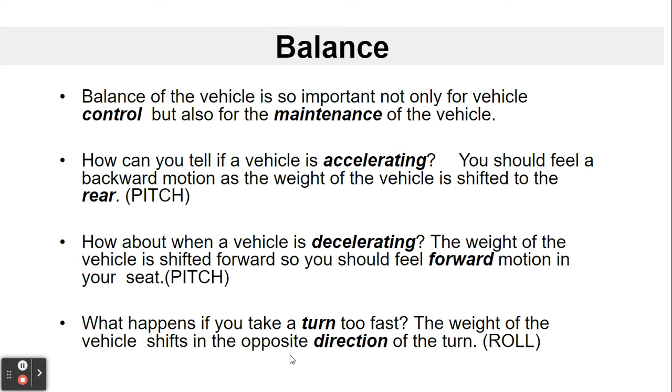How can you tell if a vehicle is accelerating? You should feel a backward motion when it accelerates as the weight of the vehicle shifts to the rear. This is called pitch. When it's decelerating, especially decelerating harder, you'll feel that pitch move forward. What happens if you take a turn too fast? The weight of the vehicle shifts in the opposite direction of the turn, and this is called roll. If we roll too hard, we actually roll the vehicle. Sliding, your back wheel sliding out, this would be considered yaw.

Single vehicle crashes - what are the factors? Statistics show that more than 50% of occupant fatalities occur as a result of a single vehicle crash. That's quite a lot. You're not safe even if there's no one else on the road.

What are the roadway conditions? They are icy and snowy. That means traction is minimal or impaired. If we put in one more factor - sharp turn, bad road or surface conditions, and high speed - the result is a single car accident or crash. 50% of occupant fatalities result from a single car accident.

Single vehicle crashes involve too fast for conditions, improper steering or braking, or a combination of all three. Remember, guys, and I will say this a thousand times: speed kills. Reduce your speed. It's not that bad.

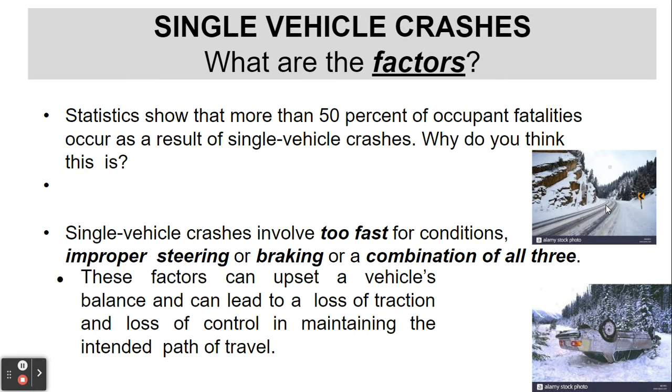All these factors can upset a vehicle's balance and can lead to a loss of traction and a loss of control in maintaining the intended path of travel. Let me tell you, once you lose control, even if you somehow gain traction back, you usually aren't in a position where you have control of the vehicle, especially if you're going fast.

Road surface and traction - you must learn to recognize conditions that may indicate a change in traction. This is vital, which in turn will require a change in speed or direction by you. And these are the types of things you can discuss on every commentary drive. What is the surface condition of the road at this very moment? What was it earlier? Let's look at the weather right now.

What can I predict about the surface conditions of the road in the next 15, 20 minutes? Is it going to change? Are they ideal? What's wrong with them? How is this going to affect my speed? How is this going to affect my turns?

Traction is the adhesion, friction, or grip between the tires and the road surface. Without traction, a driver cannot brake, steer, or accelerate their vehicle. A loss of traction can cause loss of control, resulting in skidding or worse. Traction varies with the vehicle's speed, tire condition, and roadway surface.

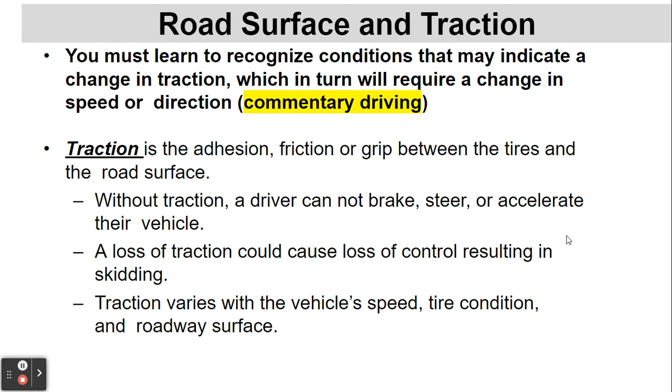This is going to be a breakout video or breakout room exercise for you. We're going to watch the video, and then you guys are going to discuss these questions together. Describe the road conditions' effect on the physics of driving in this video. Are there examples of minimize, separate, or compromise that you identify in this video? What do you think the first truck driver is thinking? What is your opinion about the actions of the last oncoming car from the right?

So we don't see him yet, but we'll see him coming up. This is the first truck driver right here. What do you think - good decision or not a good decision? Here we go.

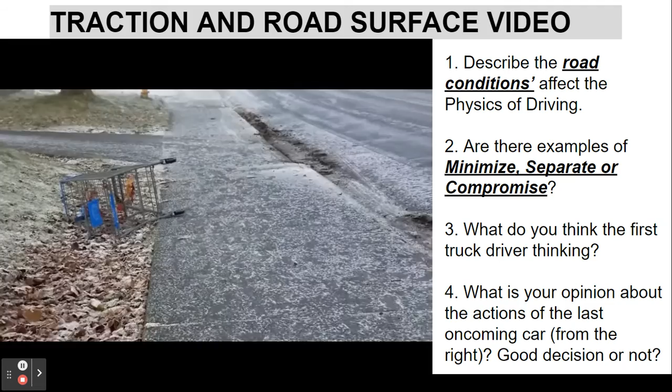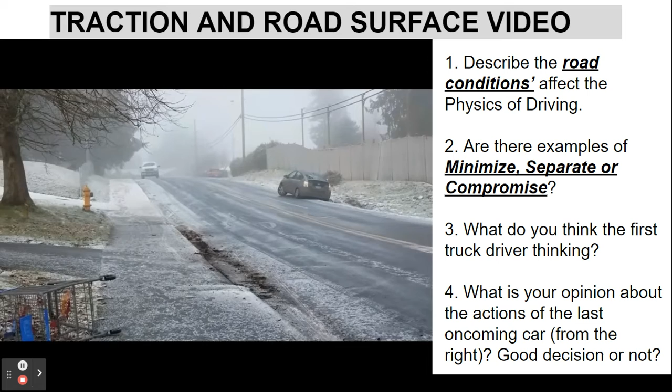Let's see if we can get this truck down. Oh, he's thinking about it. He might turn back. Oh no, he's going to brave it. He's already sliding, I think. I don't know, we'll see.

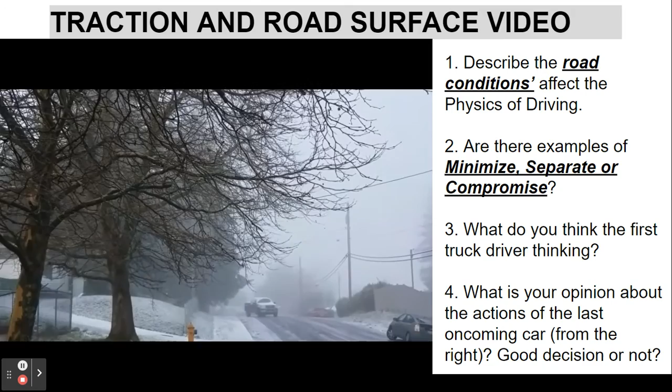Oh, he stopped. Did he stop? No, he's just going really slowly, but he's still sliding. Oh no, he's changing his mind. Oh man, this car is going so fast. He is totally going to kill it.

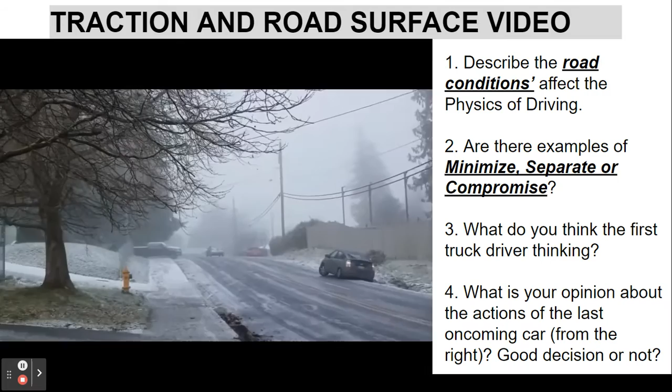Wow, impressive. He slid all around, but he did make it up. Props to him.

All right, so see if I can pause it. There we go. So what are the road conditions here? They are extremely icy, they're slick. Traction is minimal, especially on the slope. And we kind of have a crowned road here where it slopes down from the center line, right?

Are there examples of minimize, separate, or compromise? Yeah, we definitely see people trying to minimize by going around this car that's stopped on the side of the road. Looks like it got stuck there. Probably it's the driver's car. Okay, we have that.

Trying to think if we have any other situations with separate. I didn't think I saw any, but we definitely have minimize.

What do you think the first truck driver was thinking there? In my opinion, he was standing up there trying to decide whether or not it was safe to try to go down the road here. He was definitely waiting for the white car to clear out.

For that last car that was speeding along very fast, minimized and went around this parked car and then up the hill - do I think this was a good idea? Probably not. I think he was going really fast for someone with these types of road conditions, and if some other car was coming, I don't think they would have had enough distance to stop.

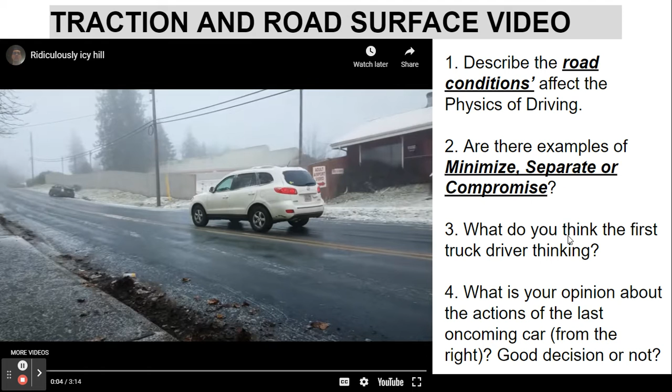Okay, here we go, road surfaces. Road surfaces produce different amounts of traction. The following are ranked in order from the greatest traction to the least, right? Concrete at the most gives you the most traction, then asphalt. Brick and polished concrete doesn't give you too much. Dirt doesn't give you much at all. Gravel's even worse than dirt. And sand over hard surfaces, not very good - it's almost like driving on snow.

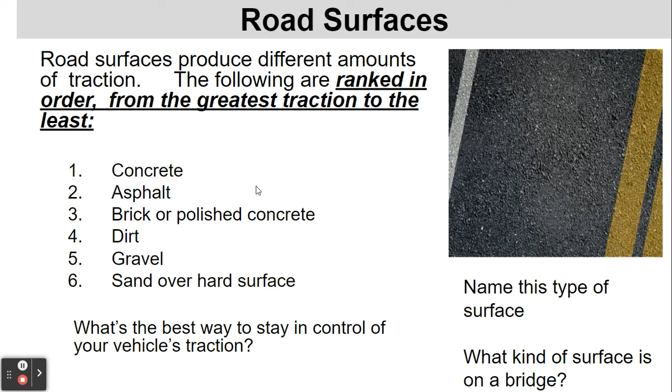What's the best way to stay in control of your vehicle's traction? The best way is to reduce your speed, okay, and try not to make sharp turns. Okay, this type of surface here is asphalt. What kind of surface is a bridge usually? Usually it is concrete because they want to make it as good for traction as they can.

Okay, conditions that affect traction - some substances on the road. So there are tons of substances on the road, and many of them affect traction in a negative way. Some of the stuff that's on the road are sewer covers - they reduce traction, especially the metal part, right? Paint, definitely, vinyl strips also. Tar reduces traction, especially when warm. Wet leaves are really, really bad. Sand is bad. Loose gravel or mud, bad. Oil, tar, radiator overflow, and rubber left by frequent vehicle starts and stops at intersections. Yep, so be careful when we get to intersections because there's quite a bit of stuff there that will affect traction.

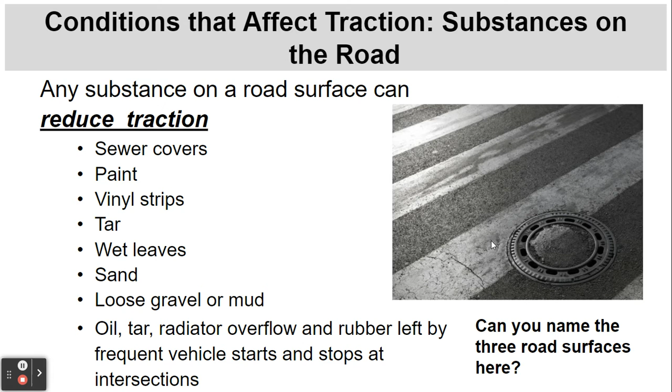Can you name the three road surfaces here? Well, we have the sewer cover with the metal, we have asphalt right here, and we have the vinyl strip or paint right here.

Conditions that affect traction: surface conditions. Poor road conditions such as rippled surfaces or potholes can contribute to a loss of traction. I've had real issues with rippled surfaces in the past—they ruined one of my tires.

At the beginning of a rainstorm, dirt and oil can rise and mix on the roadway, making the road extremely slippery. So beginning of rainstorms are really, really bad. Be very careful.

At speeds as low as 35 miles per hour and a water depth of only a 1/12 of an inch, hydroplaning can occur. Be very cautious about that—we're talking 35 miles per hour and only 1/12 of an inch. That's not much water at all, guys.

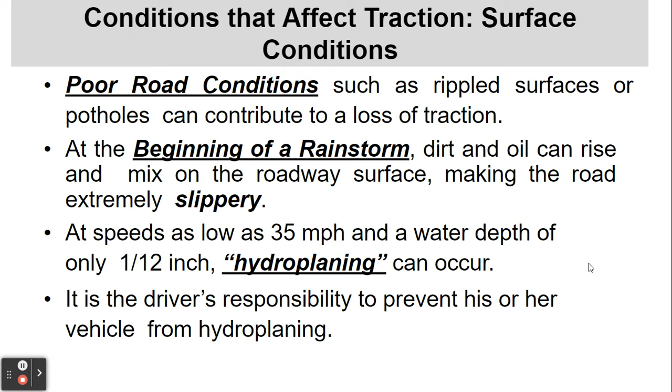It is the driver's responsibility to prevent his or her vehicle from hydroplaning. How do we prevent hydroplaning? It's all about speed and the tread on your tires.

New York State Motor Vehicle Inspection requirements for tires is a minimum tread of 2/32 of an inch, or 1/16 of an inch. In this video, we compare two identical vehicles. Only one has deep new tire tread depth, and the other has legal minimum tire tread depth—so it's still legal, but look at the difference when you see this.

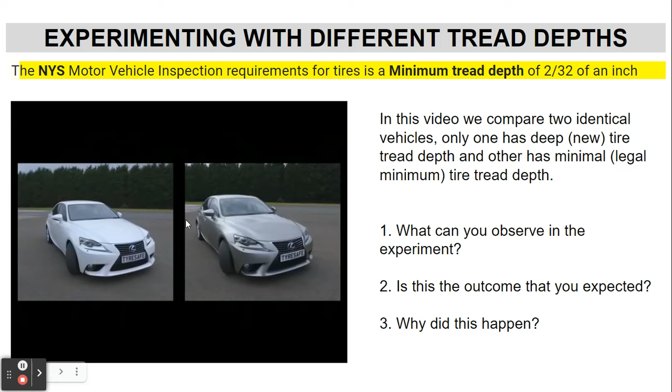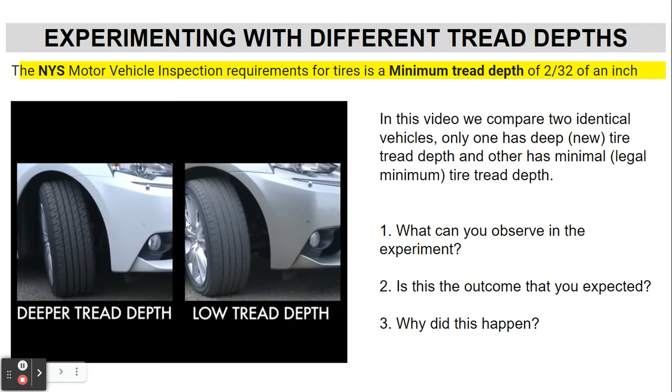To show aquaplaning in action, we took two identical cars and fitted them with identical tires, but with different tread depths. The car on the left has brand new tires with a deep tread depth, while the car on the right is fitted with tires with a much lower tread depth of 1.6 millimeters, which is currently the legal minimum tread depth. Our test track has been flooded to replicate how a normal road could look after a heavy downpour.

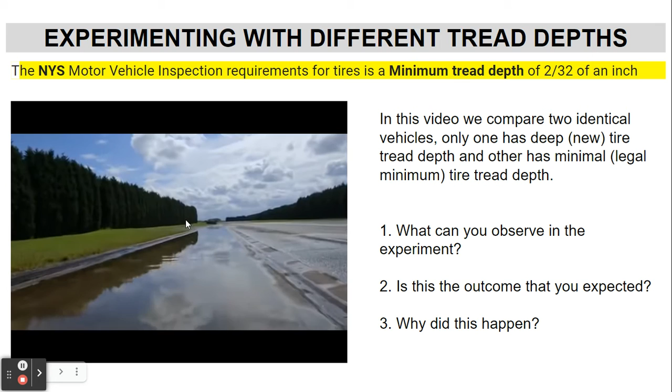Let's see how the cars and their tires cope with the hazardous conditions. Firstly, our car with deeper tread depth takes the test. The split screen clearly shows that when our driver steers the car, the wheels turn, which then causes the car to swerve on the track.

Now it's the turn of our car with low tread depth to take the test. Here, the split screen shows that despite the driver steering the car and the wheels clearly turning, the car doesn't swerve on the track. Let's have another look at the car's movement on the track in a closer comparison.

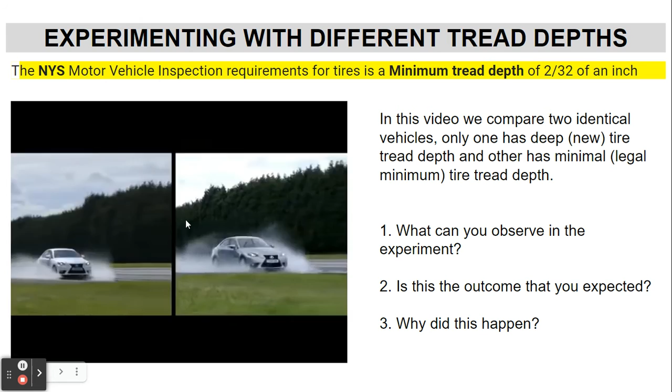The car on the left has deeper tread depth and displays clear control when steered, while the car on the right has low tread depth and doesn't swerve when steered. This is because the car with low tread depth is aquaplaning.

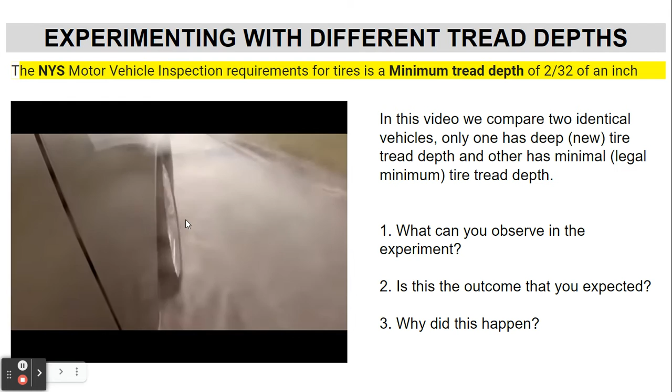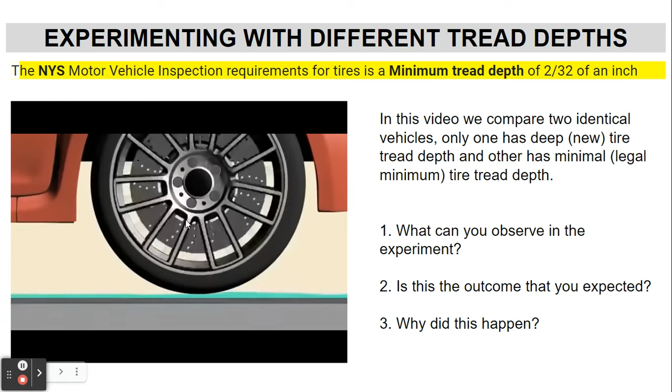So why does this happen? This graphic demonstrates what happens when a tire with insufficient tread depth comes into contact with too much water on the road. As the tire doesn't have adequate tread depth, the water cannot be displaced and builds up in front of the tire. The tire then lifts from the road on top of the water with no direct contact with the road. The driver no longer has...

So we saw what happened there with how tire tread depth affects traction on the road when there is standing water—that's what we could observe. We observed that tread depth definitely plays a role in traction, right?

Same car, everything the same except different tread depth on the tires. Is this the outcome you expected? That's up for you to tell me. And why did this all happen? Tread depth allows you to continue steering and not hydroplane.

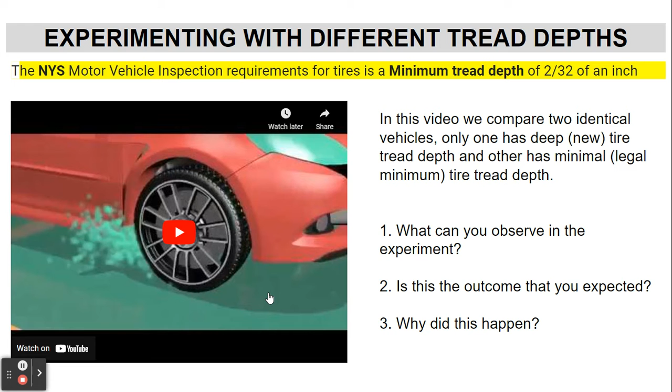Here we go, let's continue on—complete control of the vehicle. So how do we inspect or how do we monitor the tread depth of our tires on our vehicle? Let's take a look.

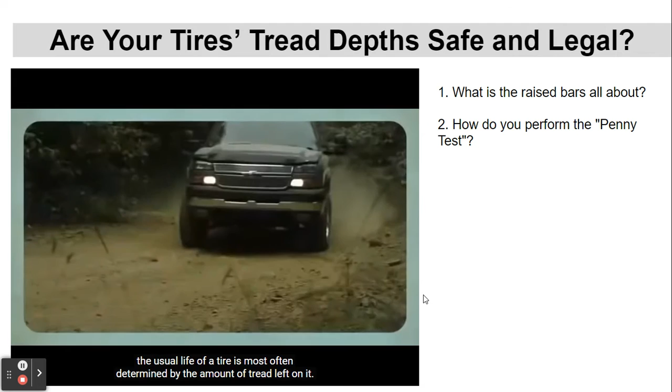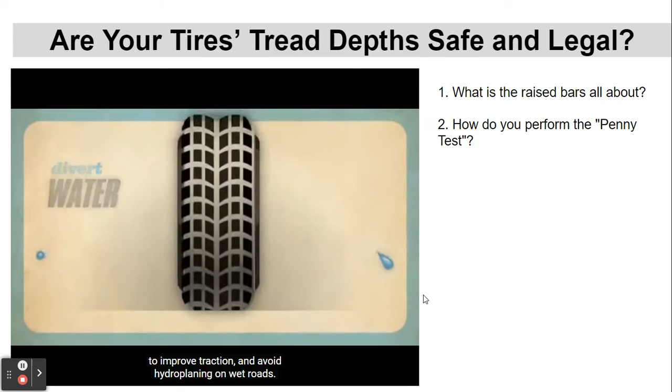Ever wonder when to replace your worn car tires? Barring any irregular or unsafe wear patterns, the usual life of a tire is most often determined by the amount of tread left on it. The primary function of tread is to divert water from beneath the tire to improve traction and avoid hydroplaning on wet roads. Tires become unsafe when they're worn.

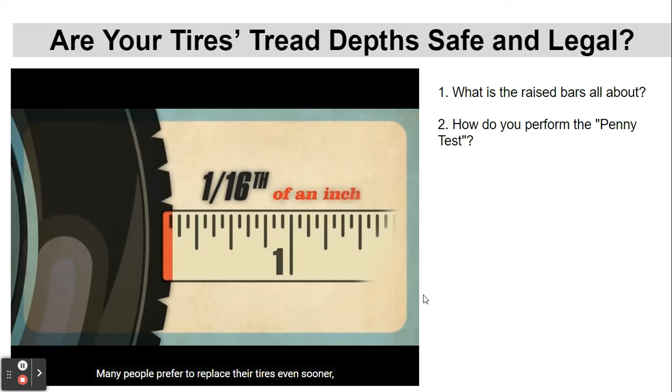Specifically, once the tread is down to 1/16th of an inch, many people prefer to replace their tires even sooner, especially when driving in adverse weather conditions. All tires sold in the United States today have what are called tread wear bars.

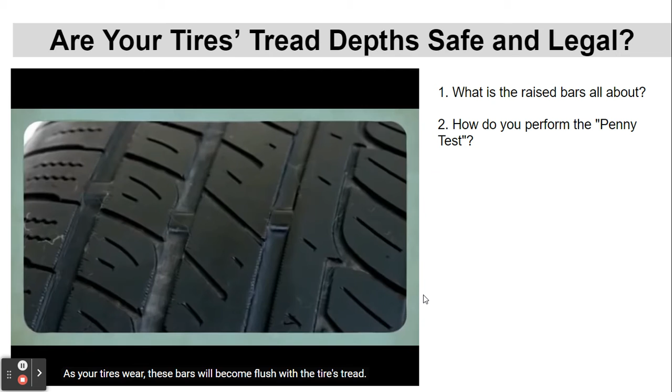These are small raised bars of rubber in the grooves of your tire's tread. Look at the tread pattern, and you'll see these bars running between the tread blocks. As your tires wear, these bars will become flush with the tire's tread. When this happens, it's time to replace the tires.

An easy way to check the tread on your tires is to do the penny test. Take a penny and place Lincoln's head in one of the grooves of the tire tread. If you can see all of Lincoln's head above the copper, it's time to replace the tire. These are unsafe to drive on. If the penny is inserted enough that the tire tread is at least as deep as Lincoln's forehead, your tires are generally considered safe and do not need replacing.

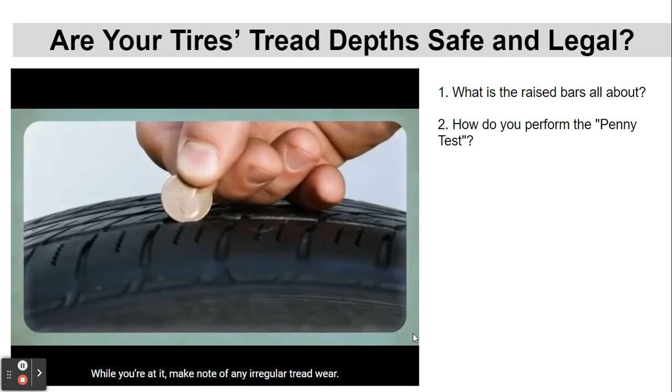Make sure when you're administering the penny test that you check all 4 of your tires. While you're at it, make note of any irregular tread wear. This could indicate a wheel misalignment or need for tire rotation, or both. Talk to one of our tire experts if you think your tires are wearing unevenly. Thanks for watching, and thanks again for making Les Schwab your tire store.

Okay, very nice, handy video to help us manage traction better, right? So the raised bars, they're there to tell you it is time to get new tires. Your tires are worn out.

How do you perform the penny test? You stick it down there, and if you can see all of Lincoln's head, you need new tires. Okay, what you want to see is his head go down to his forehead. That means you have good tread for your driving. Okay, let's move along.

I'm thinking the opposite. Let's say it was 40 degrees, it rained, and then it started getting really cold. Okay, so there's all this precipitation on the road that is starting to freeze. Okay, remember, wet ice is more slippery than dry ice. Intersections are likely to be slicker because starting and stopping vehicles polish the ice there.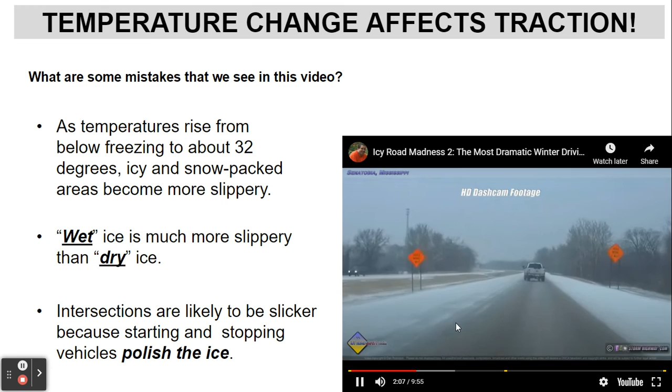Okay, so we saw a lot of stuff there. We saw what were the mistakes here that they were making. Well, they were going around that turn way too fast for the current conditions of the road, which were probably really deceptive. It's probably hard to see. It was dark at night. It had probably been raining, looked like, so there's water mixed in with the ice, which created a very, very slippery surface.

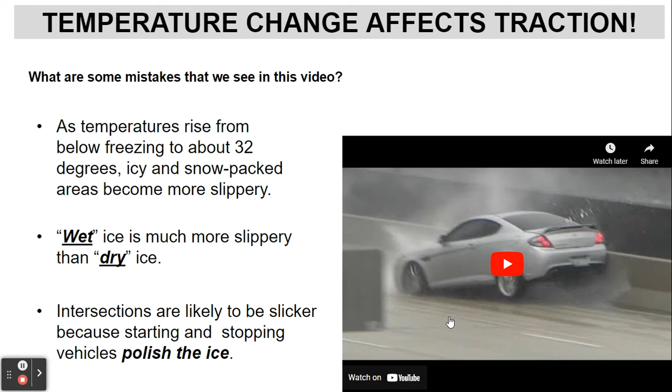So it became extremely dangerous once that first car stopped and was along the side of the road. Then it caused a hazard for all the other cars coming through, which we saw the truck couldn't manage that and also lost control too. Okay, that's there to warn you about the dangers of wet ice and icy water. Okay, it's really hard to recognize that, especially at night.

Conditions that affect traction, other factors. So bridge surfaces, overpasses, and shaded areas may freeze before other road surfaces, and they are the last to thaw out. Wind gusts and strong crosswinds can make steering on a slick surface difficult.

That's true. And guys, in the wintertime, that strong wind out here is going to blow a snowdrift across the road. And it can be large, it can be deep, and your traction is not the same in half a foot of snow as it is on wet pavement.

Large buildings or embankments may block the wind and cause a sudden change in wind direction, or they also shade the pavement and may retain icy conditions there. There are often patches of ice where the wind has swept over the road, definitely. And wet leaves can cause unequal traction. Wet leaves are just as dangerous as ice.

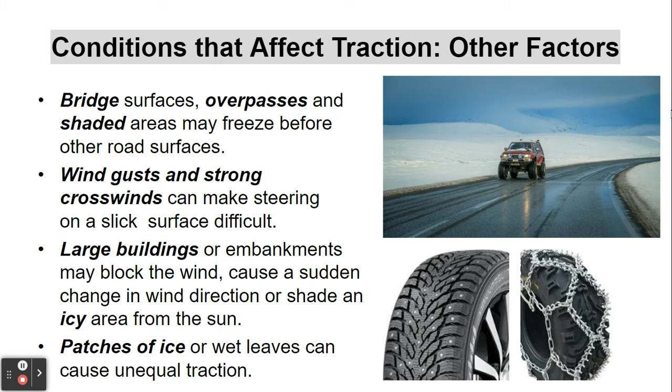All right, so crowned and banked roads, very quickly. If we have a banked road, it definitely helps a bit with traction. Here we have a crowned road. Crowned roads we saw in that one video where we had the car slipping down the road - they can actually contribute to a loss of traction, as we saw there. Okay, let us continue.

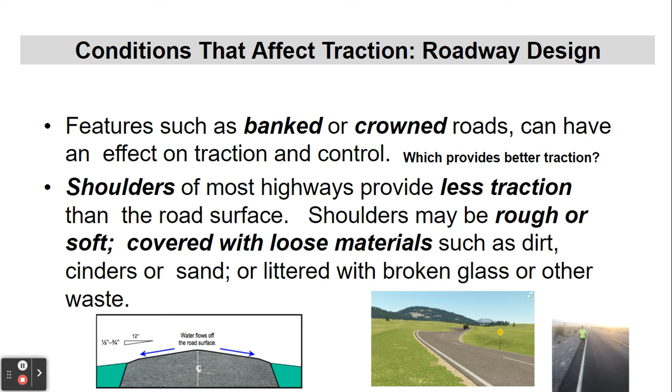Tires and traction - we talked about the tread. Worn and bald tires are dangerous, and you will hydroplane so much faster with bald tires. Please get them changed for everyone's safety. They will not grip a wet or icy road. The tire may puncture, causing a blowout - they puncture a lot easier.

Okay, we have the tire inflation situation. How do you check for proper tread depth? We did the penny test. How do you know how much air to put in your tire? This is very, very, very simple.

Go to your local Wawa - right here it has Wawa, I'm not getting paid by Wawa to say that. Go to any place like Stewart's, any gas station where they have free air. When you go there, you're going to need to open your car door and find this information. This tells you how much PSI your tires need when they're cold. So do this first thing in the morning - don't do it in the afternoon or evening or when you've been driving all day long.

You set the gauge on the free air machine for your PSI, then undo the little cap on your valve, stick that thing on there, and it will start pumping air. You let it keep pumping until it starts dinging or beeping, and that means it's done - it's not going to pump any more air in. Then you do it for your other three tires. It's really simple and very, very helpful.

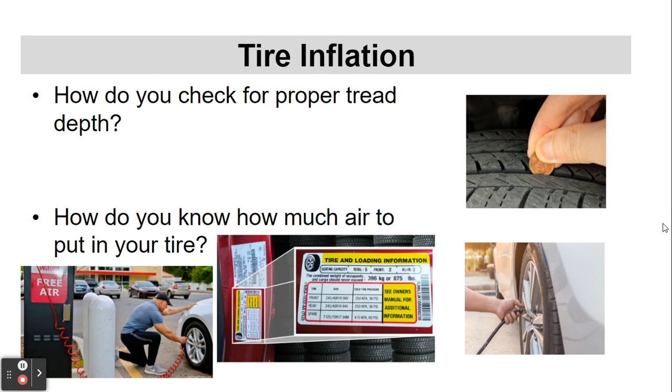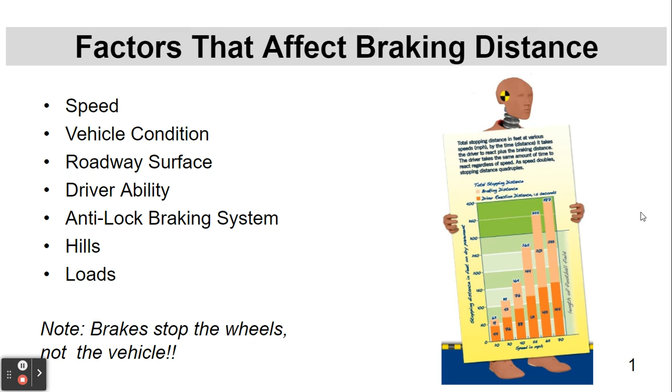Factors that affect braking distance: there's speed, vehicle condition, roadway surfaces, driver ability, reaction time. Anti-lock braking systems are different - we want a good one. Hills will affect it, and loads will affect it. Remember, brakes stop the wheels, not the vehicle. The vehicle will continue even when the wheels are locked.

Force of impact is the force with which a moving object hits another object. Three factors determining how hard something will hit another object are speed, weight, and the distance between impact and stopping - or between starting to stop and the impact.

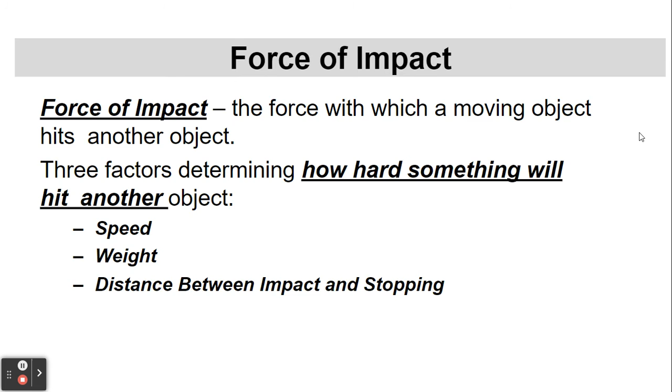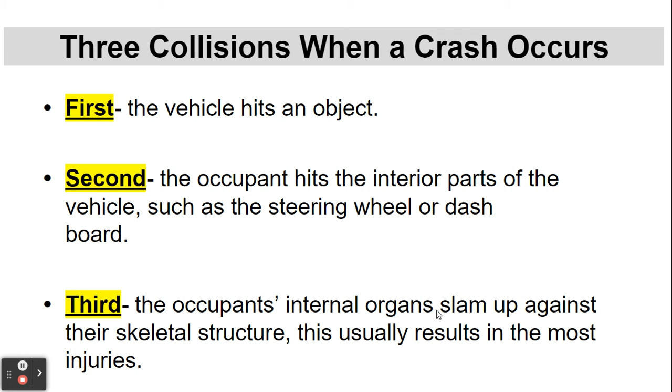Put it that way - three collisions when a crash occurs. There's actually three collisions whenever we have a car crash. The first is the vehicle hitting an object. The second is the occupant hitting the interior parts of the vehicle, such as the steering column or the dashboard, or even the front seats if you're in the back. The third collision is the occupant's internal organs slamming against your skeletal structure, or your brain slamming against your skull - the inside of your head. This is actually where the most injuries occur.

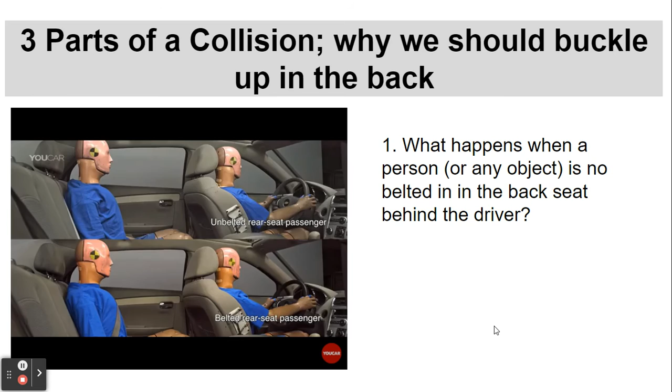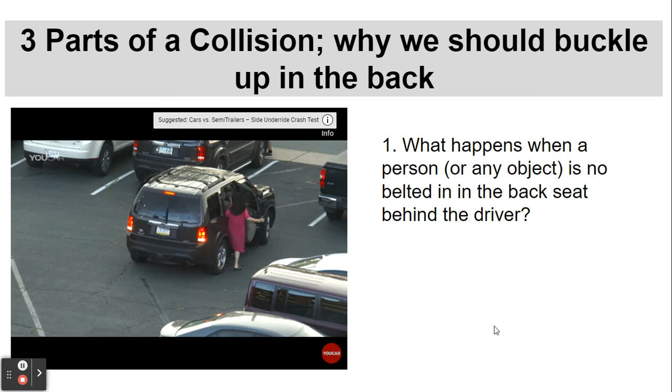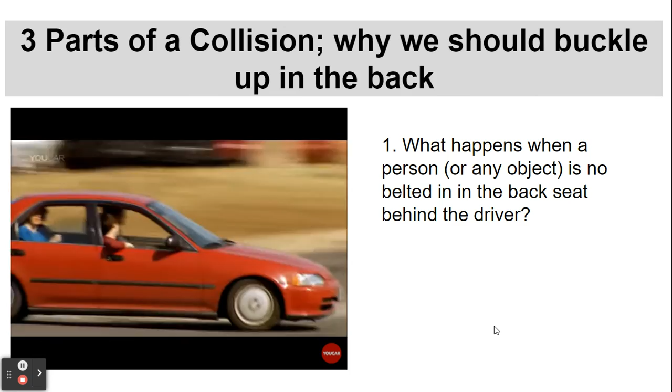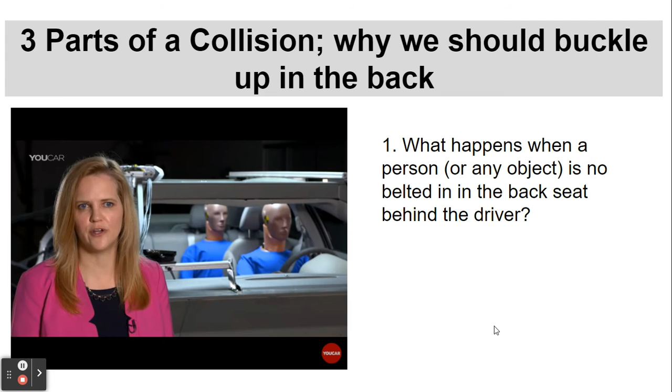It's a habit for most of us to buckle up while we're driving, but what about when we ride in the rear seat of someone else's car or use Uber or Lyft? The Institute survey found that full-time belt use is lower in the rear seat, especially true for people who primarily get around by taxi or ride-hailing service. Less than 60% of people who said they frequently take taxis or use ride-hailing services said they always wear their belt. People who reported buckling up less often were asked for their reasons - a quarter said they believe the rear seat is safer, so using a belt there is unnecessary. If you're not belted in the rear, you're putting yourself at risk, and you're also putting other people in the vehicle at risk. People belted in the front seat can be injured or killed by unbelted occupants in the rear flying forward in a crash. We recently conducted a test to show what can happen when there's a crash and the person in the back is unbuckled. In a simulated 30...

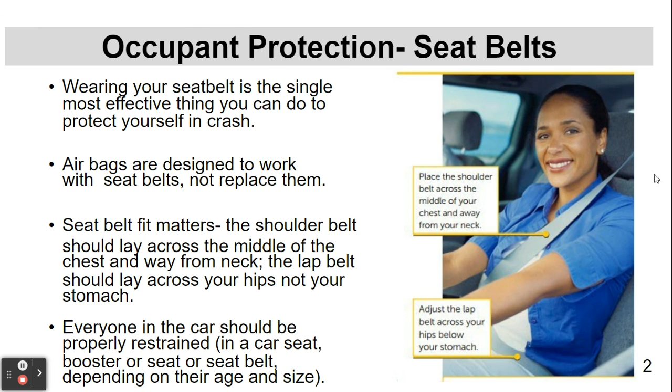Okay, so moving along - what happens when a person is in the back but not belted in? He or she becomes a projectile and is dangerous to all the other occupants and himself in the vehicle. Okay, and right now we will take a stop.